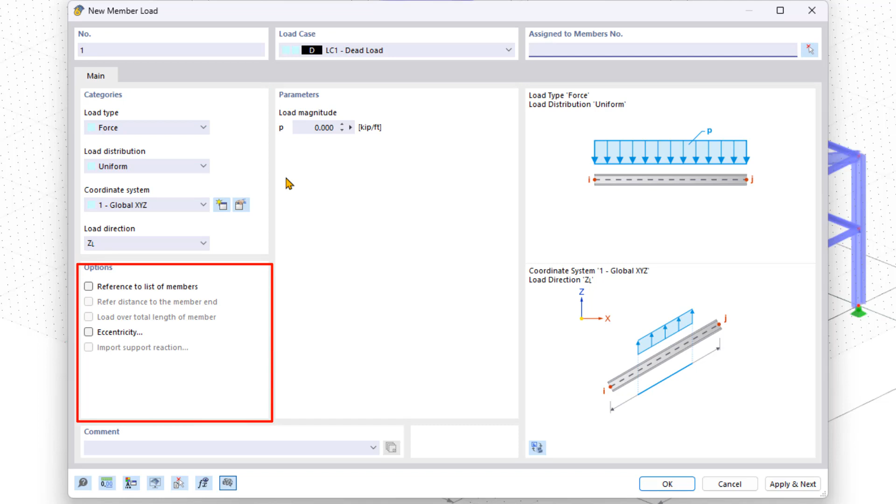You can do this by clicking the New Member Load button, and the selected load case from the list is imported into the New Member Load dialog box by default, but you can change it retroactively. In the Categories section, you can customize the load properties. There are additional options below this, such as eccentricities as well. In the Parameters area, you enter the desired load size and confirm it by clicking OK.

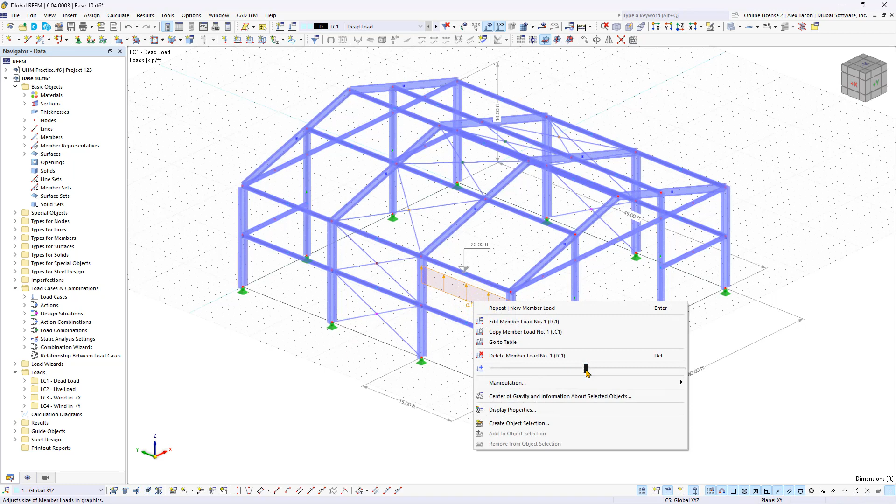Select the members in the structural model to which you want to apply the member load and confirm again by clicking OK. You can adjust the display size of the load with the controller in the shortcut menu, as well as double-click on the load to edit it and change anything you'd like.

Since the dead load case acts on the entire model, we'll now delete the member load that we just created and use a load wizard to create several loads for the steel hull simultaneously. We can expand the load wizard in the data navigator and double-click on member loads from area load. This way, surface loads can be automatically converted into member loads.

As usual, this dialog box consists of a list of available load wizards on the left, properties and options in the middle, and bitmaps on the right. Start by selecting the correct load case from the list. Use the symbols to the right of the list to create new load cases directly in this window, or edit the selected one. In the Categories area, set the correct parameters for the respective load. The bitmaps on the right adapt immediately to the new properties.

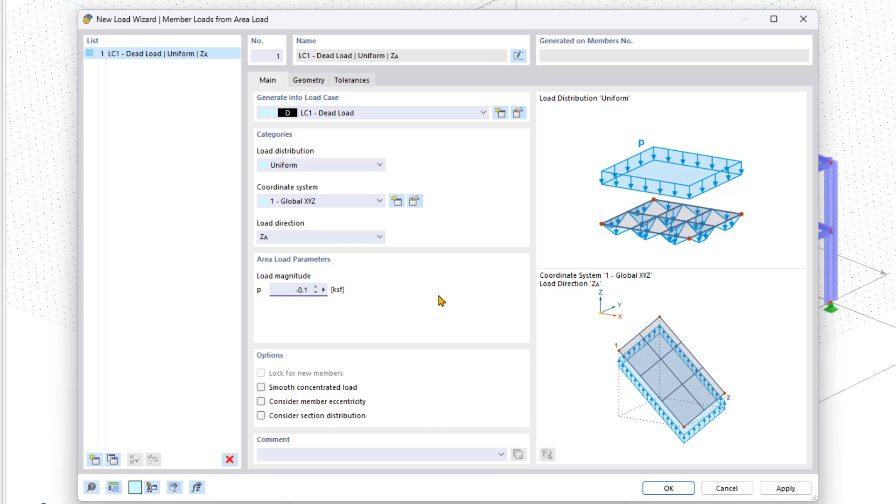For the load size, add the corresponding value. You can find further options for this load wizard below that you can activate, and we'll leave them at the default setting. Now, we'll move to the Geometry tab. You have two options for applying the loads to the steel hull. Depending on the command selected, you either define a plane via corner nodes or select cells in the graphics.

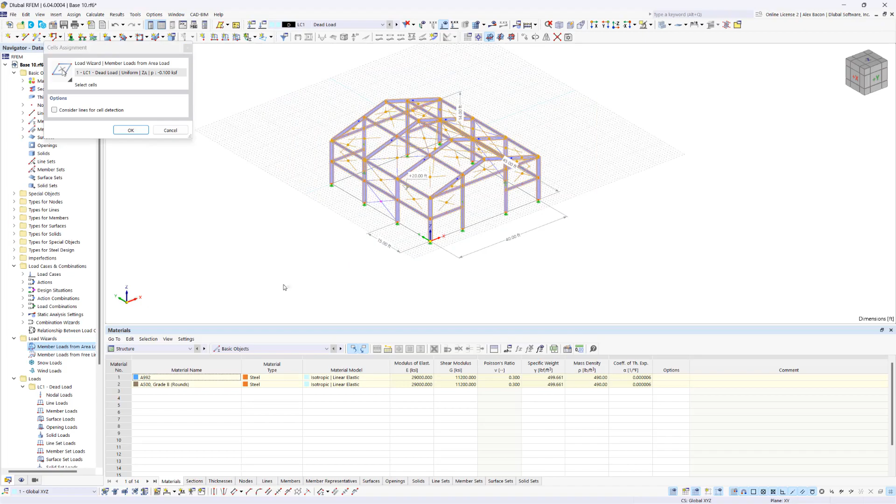Click on Select Cells in Graphics and draw a selection window over the entire structural model. You can deselect the relevant cells by holding down the Shift key on the keyboard. Once satisfied with the input, confirm it by clicking OK, and you'll see all the selected surfaces listed.

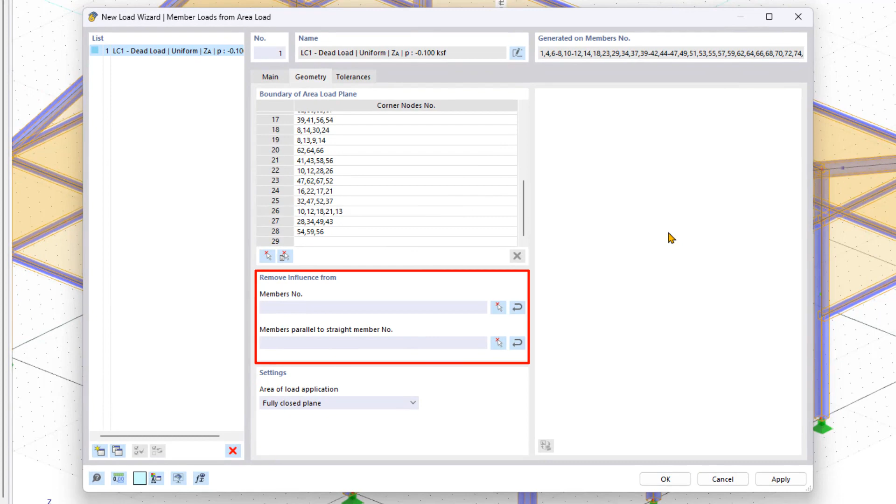You can also exclude certain members from this loading by clicking on Members Parallel to Straight Member and selecting the desired member in the steel hull. Confirm the dialog box by clicking OK, and you'll now see the inserted loads on the structural model.

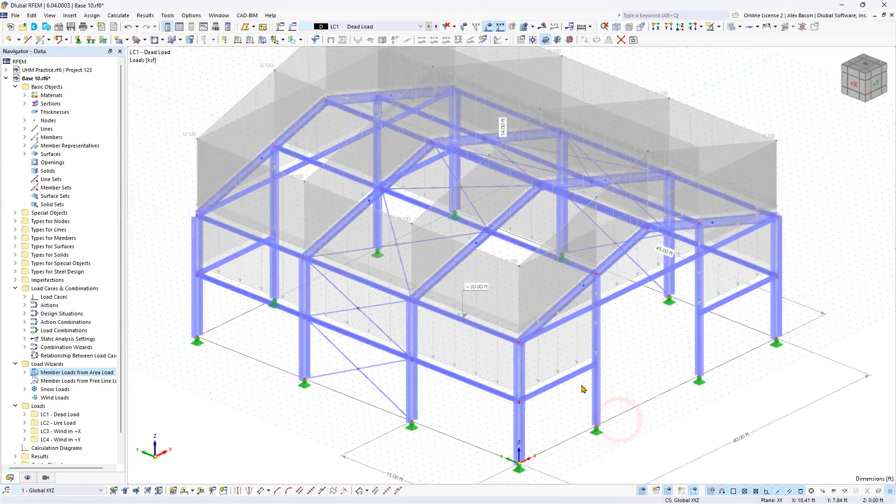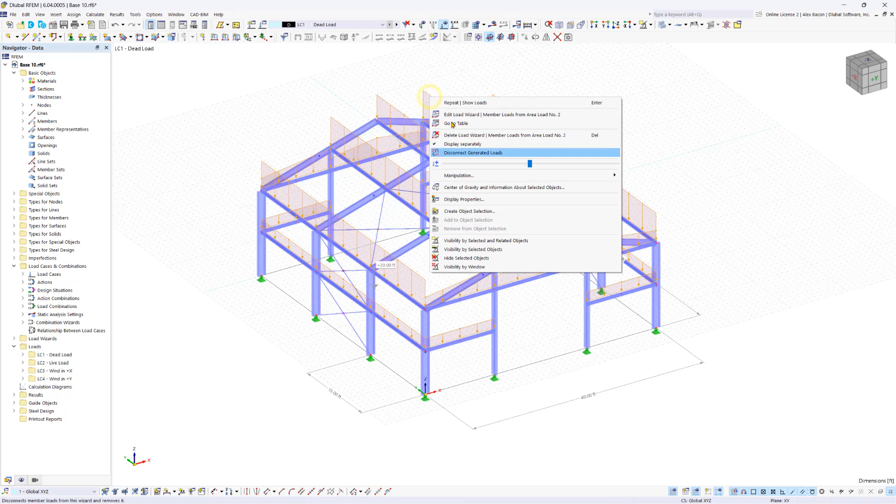To display the load distribution, right-click on the loads. Additionally, you can hide the load values or even the entire load using the respective buttons in the toolbar. In the dead load case, we've inserted the complete loading. In the next video, we'll explore other load wizards.